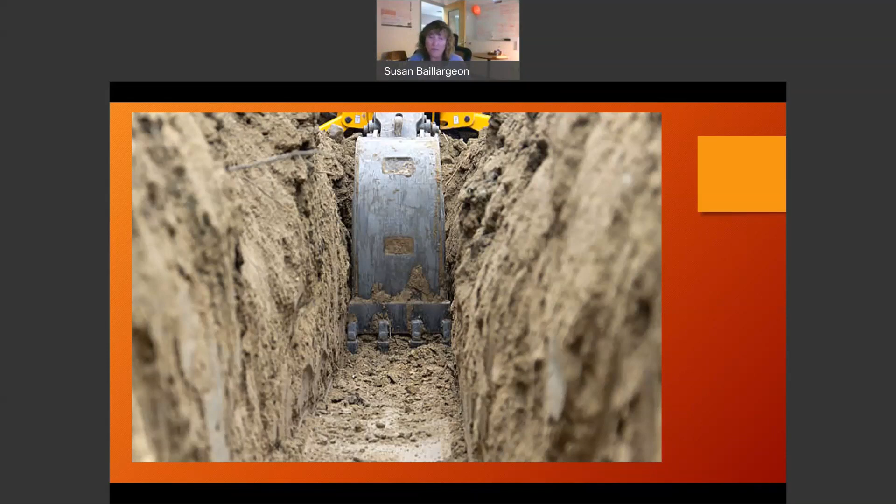The first step in the planning process is to evaluate the need for trenching, shoring, or sloping. The competent person should conduct this evaluation, and it should be an evaluation of the soil. They should recommend the correct type of protection from a cave-in and apply the proper standard according to OSHA 29 CFR 1926 Subpart P. That's important, and I'll give you all of that at the end as well.

Always get a call before you dig or a locates ticket before work begins, and never start digging without knowing where all of the utilities are located, underground as well as everything overhead. And have a spotter if you're out there doing anything with overhead work, particularly if you've got booms or arms that are lifted up. Mark the area to be excavated and clear the area for the placement of excavated materials.

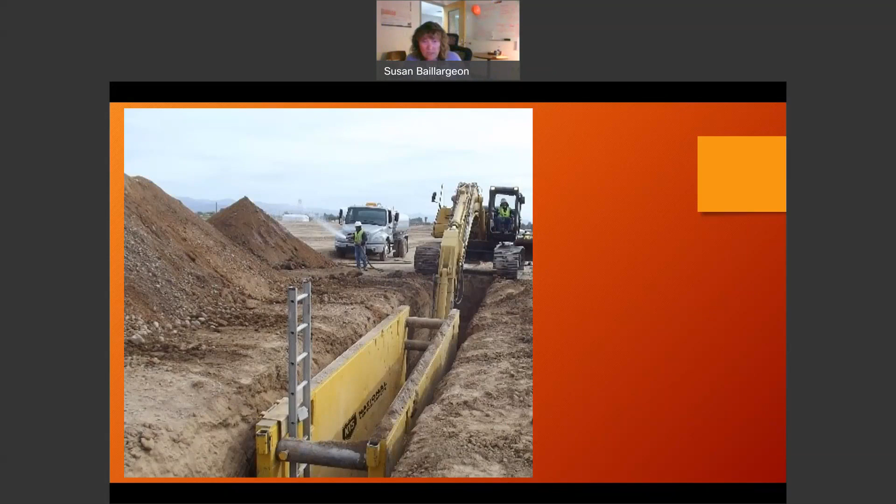So here's a little bit more about soil. These are the four types of soil that you might encounter. So there's stable rock, natural or solid material that stays intact. There's Type A, which is previously undisturbed cohesive soil with an unconfined compressive strength greater than or equal to 1.5 tons per square foot. Now there's a lot of technical information up here, but this may be something you have to look up later, or your competent person should at least know about.

Type B soil is unconfined compressive strength of greater than a half ton per square foot, or less than 1.5 tons per square foot of angular gravel, silt loam and sandy loam, and in some cases silty clay loam and sandy clay loam.

Type C. Now Type C is probably the one that you should remember the most, and you should probably use protection for Type C most of the time. This is unconfined compressive strength less than a half ton per square foot. And this is the same granular soils, including gravel, sands, loamy sand soil and soil where water can flow freely. So this could be damp areas, could be places where water collects, but this is the type of soil that you need the most protection for.

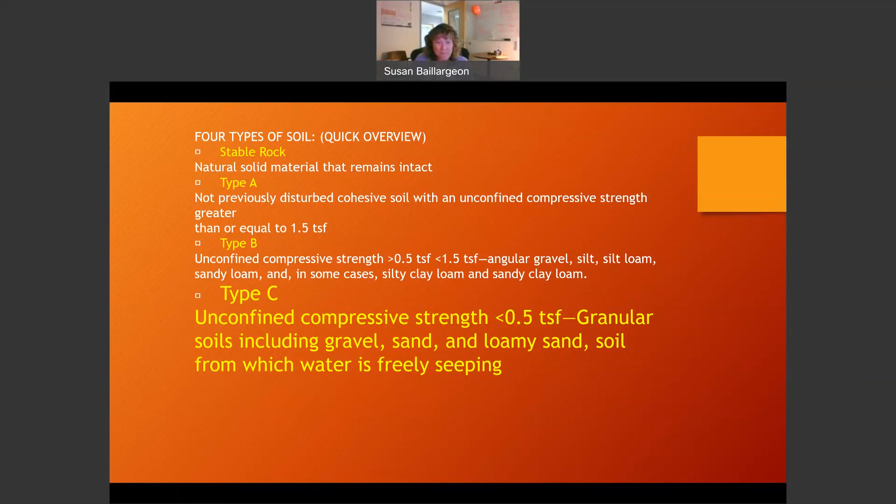Excavated material should be, again, placed at least 2 feet from the edge of the trench or excavation. Any closer, and the material would add pressure to the walls, increasing the likelihood of a cave-in. No one should be working on the sides of sloped or benched excavations unless the workers at the lower level are protected from falling material. So no one should be working around that with material that could fall down into the hole.

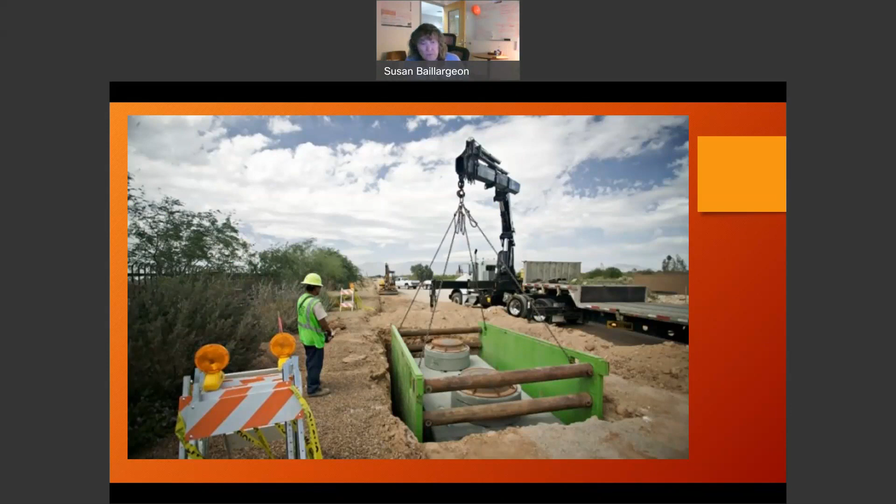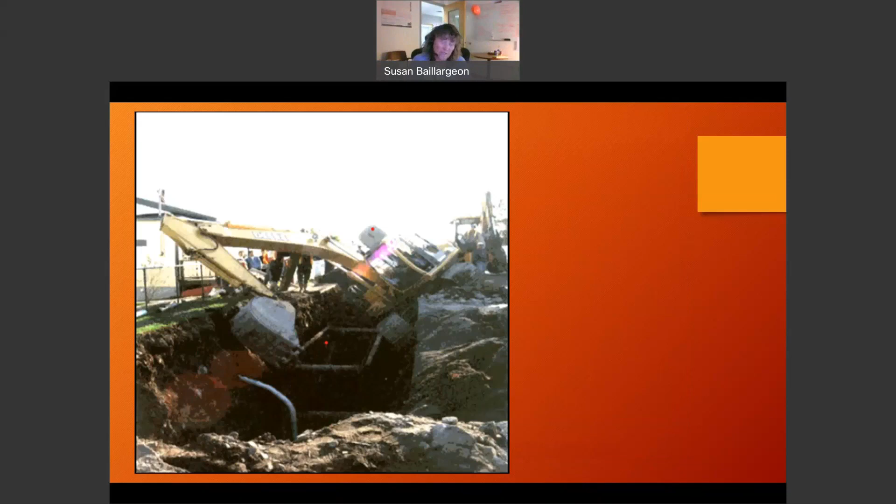Take precautions to ensure that traffic or vibrating equipment nearby does not cause a cave-in, and keep both as far away as possible. Resist the temptation to get your equipment just a little bit closer because this will be the outcome. Don't do it. Try not to straddle the ditch as you're digging it. Some excavators will put their machine tracks or wheels right on both sides of it and work along it; that's not a good idea. It's just not worth it. So resist that temptation because a cave-in will not give you any warning. It will just happen instantly.

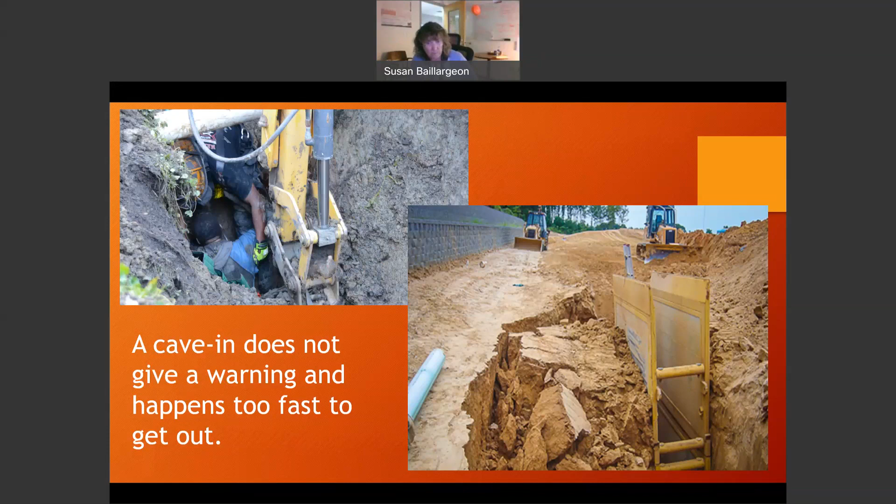And it usually or can be caused by groundwater. That is a common cause of collapse in any trench or excavation. The competent person on the job should keep all people out of the trench or excavation where water is accumulating until some kind of precautions can be taken to protect them. And this could include anything from pumping, shoring, or using lifelines or harnesses if the work has to be done in those conditions. But most likely you won't put anyone in there in that case.

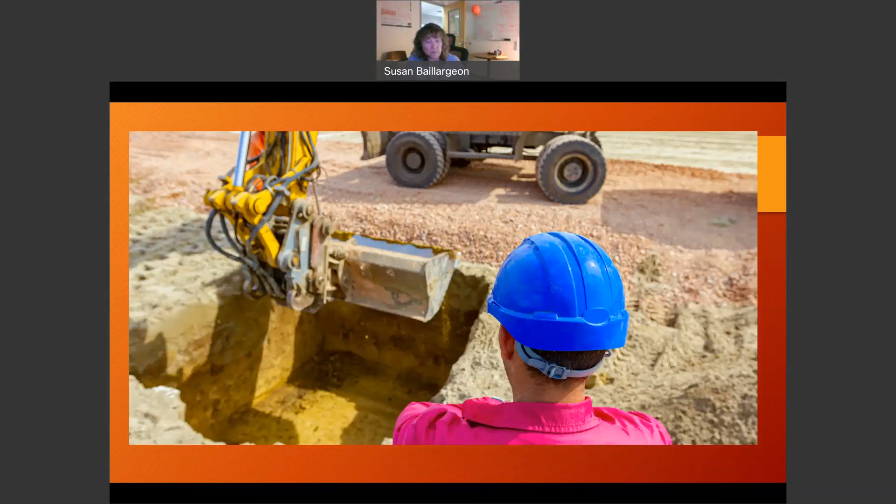So under no circumstances are workers permitted to be under loads handled by lifting or digging equipment. They must stand away from the loading or lifting activities. Right? Nobody should be in that hole while that bucket is lifting or pulling material out of there.

So trenches that are 4 feet deep or deeper must have a means of exit within 25 feet of the workers, right? So this means every 50 feet, you'll probably need a ladder or some means of exit in there. Most of you will use ladders for entry and exit, but that could include anything from a ramp or even just an open end. So if the end of your trench is 25 feet away from the rest of it, that can count as an exit as long as it's within 25 feet.

Ladders, if you're using ladders, they should extend at least 3 feet above, like it shows here in the picture, above the surface of the excavation and be tied off to some type of fixed object. Most of you will be trenching in holes that are probably 25 feet or less, and one ladder will usually be enough. But if you do anything longer, like you see here in the picture, you will need to station them within 25 feet of the workers.

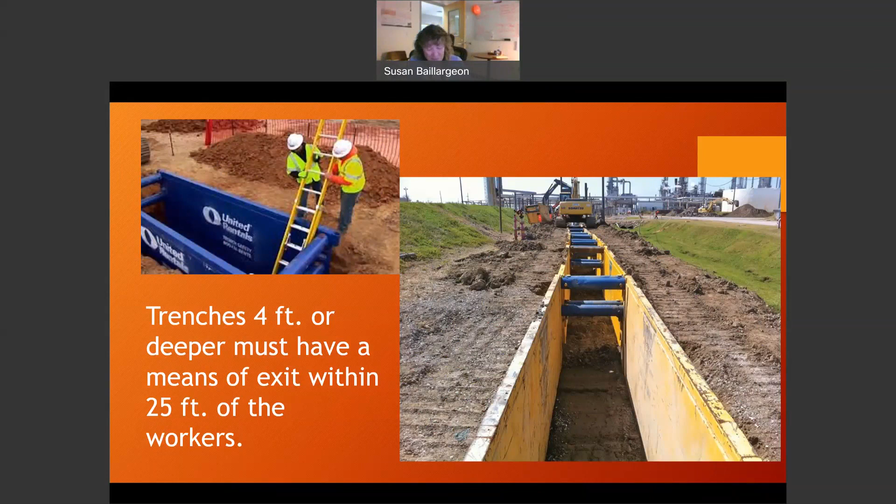So again, we were talking about sloping, benching, shoring, that type of thing. And here's another picture that shows some of that activity. You can see that the truck actually goes down into the trench, so you need something bigger. And most of this is done by a professional engineer to design these types of sloping, benching, shoring systems, and some of these trenching systems, depending on the size of it.

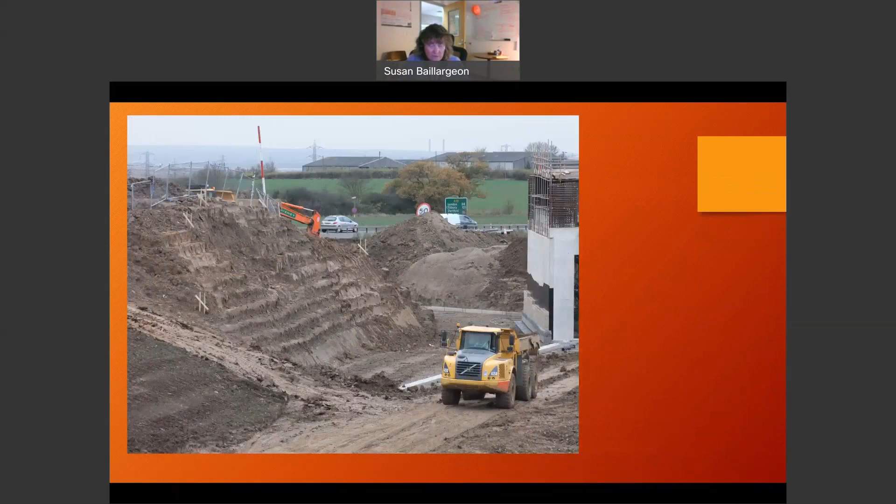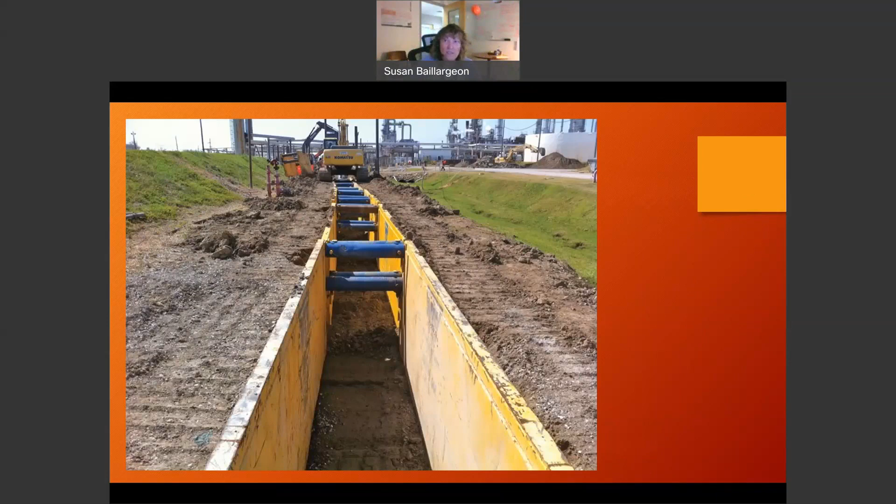Again, avoid straddling, and this is a good picture of one of those excavators that has straddled the ditch. If you're at the end, and your tracks are over solid ground and not on the walls of the ditch, it's probably okay, but this is clearly not, and this is a situation to avoid. Instead, try to keep your equipment, again, at least 2 feet off, and here's a good picture of where they are just sort of moving their way down the excavated area.

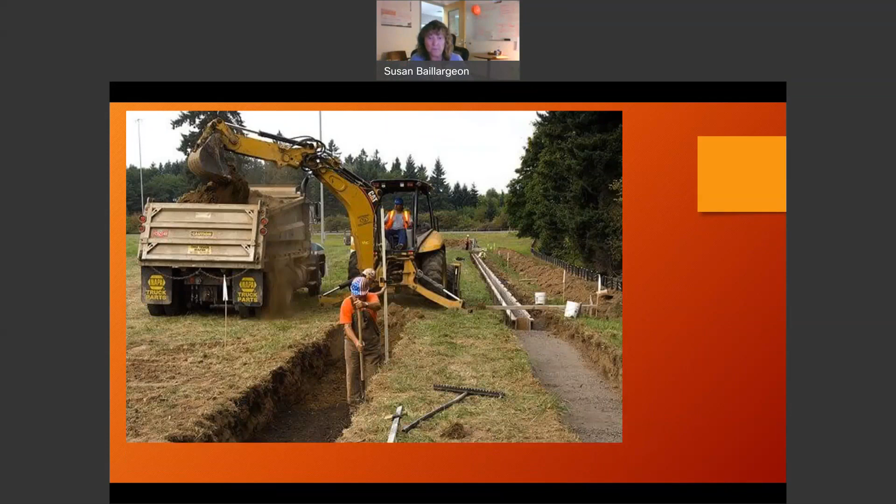All right, so here's a checklist for you all to sort of remember and take a look at. Before trenching begins, check the type of soil and the condition, check the proximity to overhead utilities, and make sure you get a locates or a call before you dig ticket. Check the surrounding area for any disturbed soil, trees, boulders, or other hazards, things that might fall in or you could encounter beneath the soil. Check for all required equipment and make sure that it's all there, including any PPE, any shoring materials, any signs, machinery, barricades, whatever you're going to need to get the job done that day, including all safety apparatus.

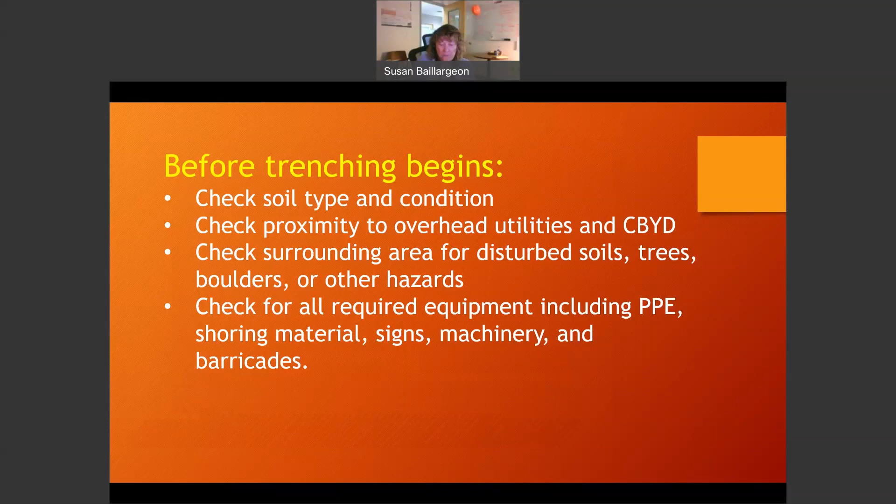During the trenching activities, make sure you check for any changing ground conditions. Check for potential oxygen deficiency or gaseous conditions, right? Are you working around an area where there's a lot of exhaust or anything like that? Make sure you're aware of what's going on there. Check adequacy of shoring or sloping as work progresses. Make sure that your system is still working.

Check for all your required exit points. Make sure those ladders are up or that your people are still able to exit in case of emergency. Check all parts of the protective system and the connections to it. Make sure that they're all still working. And then monitor all vehicular and machinery operations and the patterns of operation to make sure that they're not entering or exiting an area that would cause any undue pressure on the walls of your

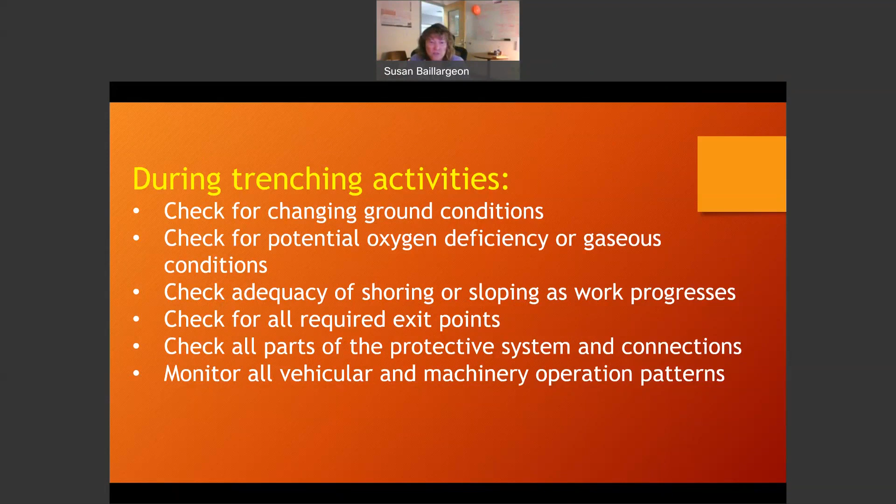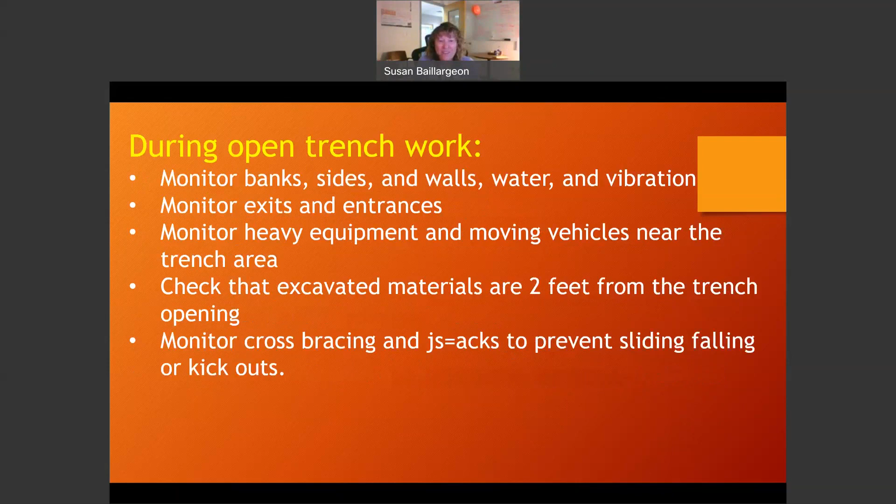trench. So during open trench work, again, monitor the banks, the open sides, the walls, the water, the vibration, anything that's going on around or within the area. Monitor those entrances and exits. Monitor any heavy equipment and moving vehicles near the trench area. Check that the excavated materials, again, stay 2 feet from the trench opening. Monitor any cross bracing or jacks to prevent sliding or falling or kickouts.

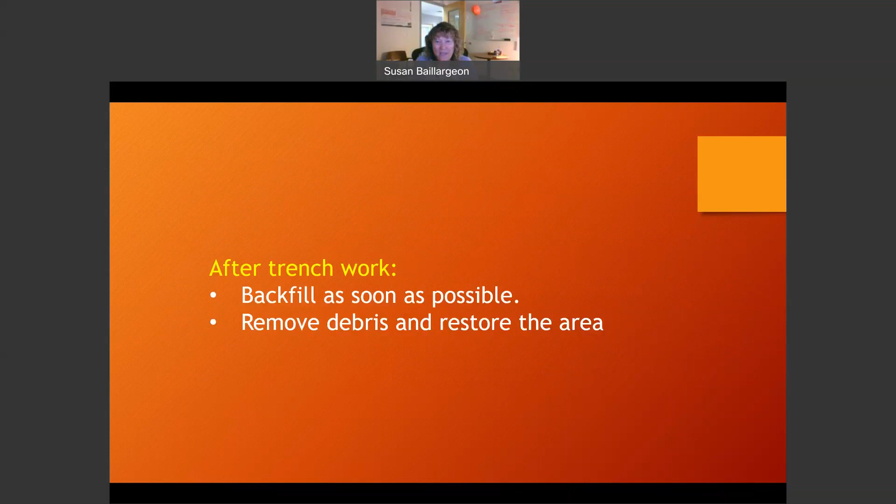After the trench work is done, backfill as soon as possible, remove any debris, and restore the area to as much as possible its original condition. And I just want to put this last slide in here. Now, I really want to show this because just to impress upon all of you the importance of trenching safety, here's a short story that we can really all learn from.

And now you might be asking yourself why he died if he was only buried up to his shoulders, right? If his head is still exposed and he can still take in air, how did he die? Well, remember how much all that dirt weighs when it's pressing on you, about as much as a small car. And when your lungs are being squeezed by all that pressure, you just can't inhale. So even though his head was exposed, his lungs were still being pressed by all that dirt. It's a horrific way to die. It's just not something you want to see, not something you want your crew to experience. So trenching and excavations are serious business and they can be deadly if you don't take them seriously.

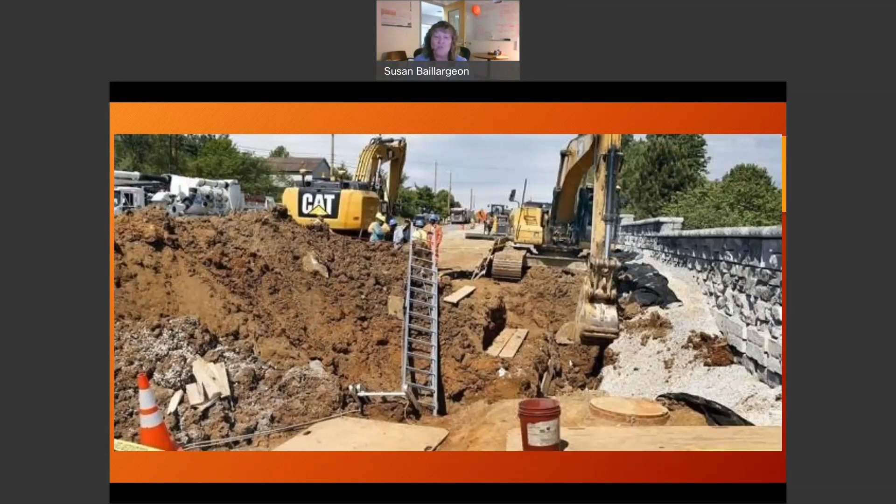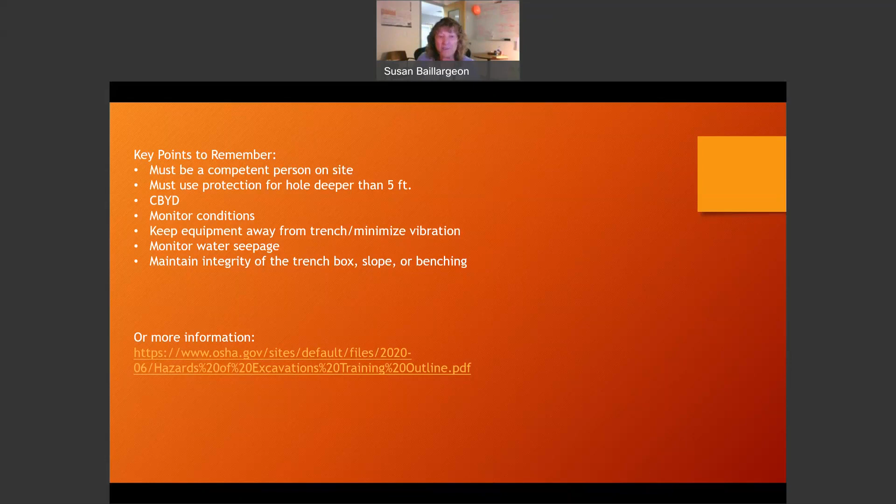For more information on this, you may go to osha.gov for hazards of excavations and any training that may be in there, and you will see all of the material that I used to create this today.

So thank you again for attending the LTAP Tailgate Talk, and I hope you found the trenching safety topic helpful and that you incorporate this into your daily routine. I always like to tell you guys, you've heard this from me all the time, that we're not doing this because things might happen. We're doing it because they have. And these are the lessons we've learned. Don't let your crew learn the hard way. We know how to protect ourselves from this. So take the lessons we've learned to heart and employ them in your work every day.